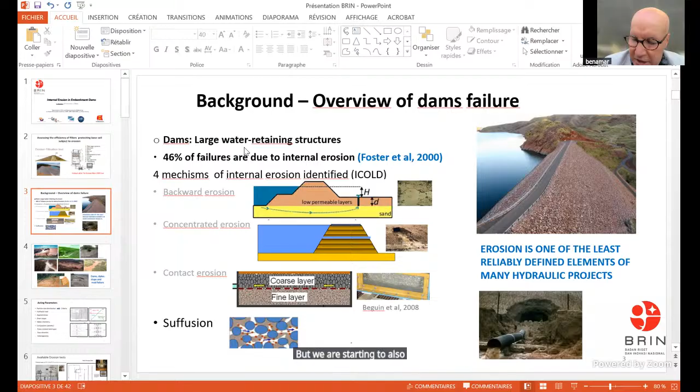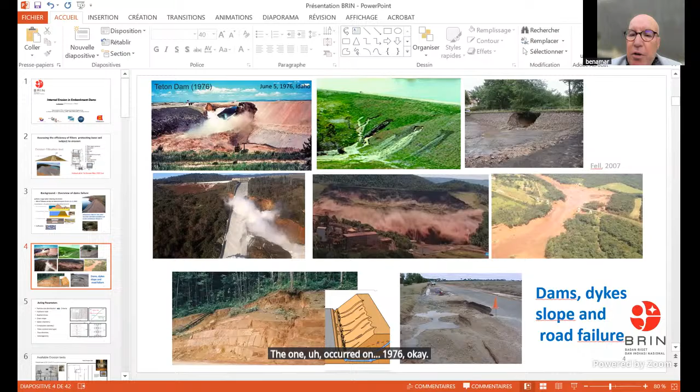These pictures show many incidents which happened over the world on dam collapse. The famous one is the one that occurred on Teton Dam in 1976. It was the most documented incident of dam failure.

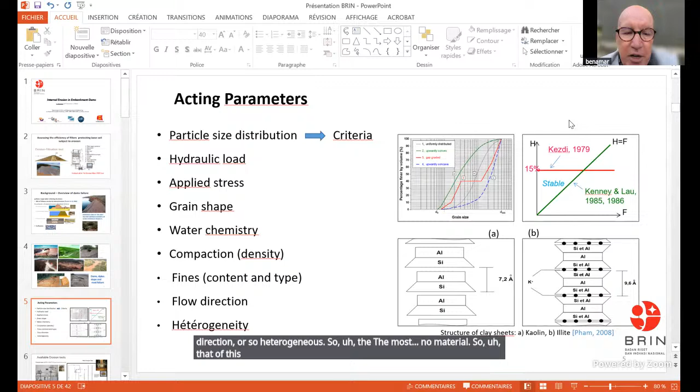Regarding the acting parameters on particle size distribution, many criteria were assessed by researchers: hydraulic load, applied stress, grain shape, water chemistry, compaction, fines content, flow direction, and heterogeneity. The most known criteria is that of Kezdi, which are still used in research.

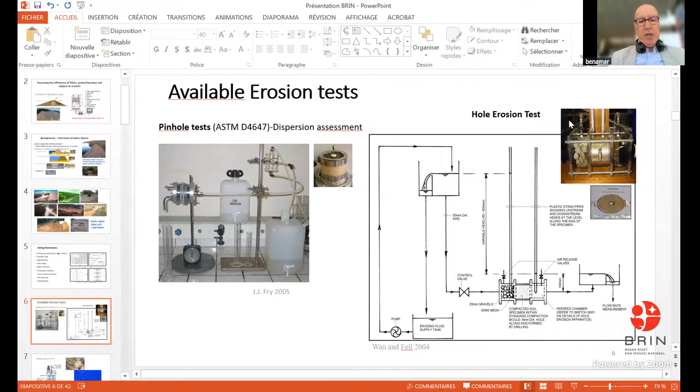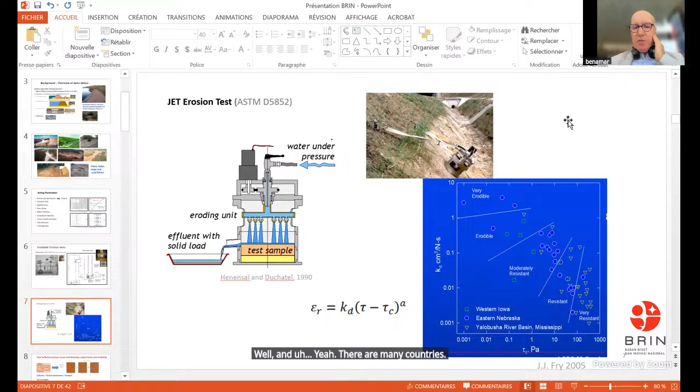The second one is the jet erosion test. This jet test was mainly used in the US. It was a dynamic hydrodynamic test, and there are many criteria in classification for this test to identify erodible soils.

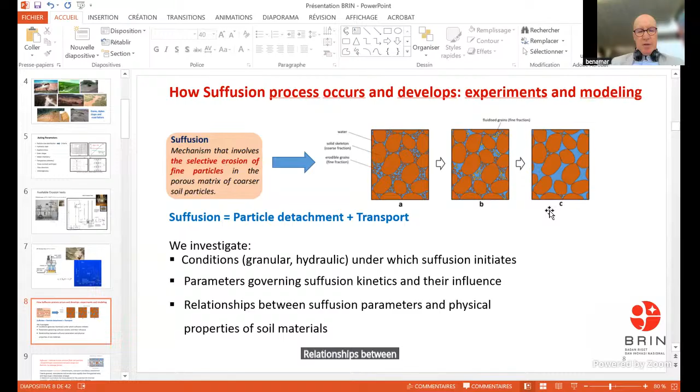Suffusion is both processes, particle detachment and transport through the porous material. So we have investigated the granular conditions of the tested material, the hydraulic conditions under which suffusion is set, parameters governing suffusion kinetics and their influence, and relationships between suffusion parameters and physical characteristics of soil material.

Suffusion is an internal erosion process where finer soil particles move through constrictions between larger soil particles by seepage forces. When internal erosion initiates, we also need to understand how it can develop and what the kinetics of this process are. Coarse-grained, non-cohesive soils erode more rapidly than fine-grained soils, as experimented in the lab, and have lower threshold stress.

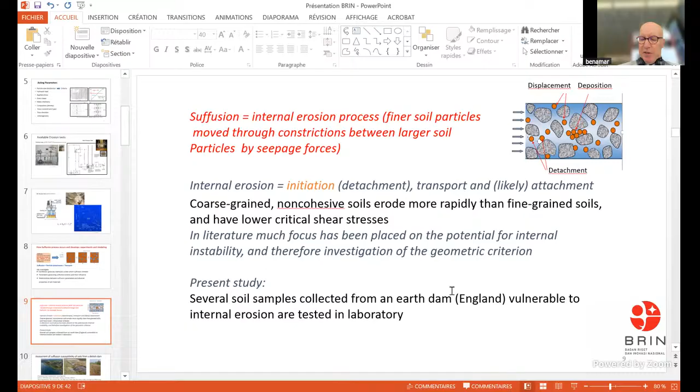In literature, much focus has been placed on the potential for internal instability and therefore investigation of the geometry. I present here a study about several soil samples from England, which is susceptible to internal erosion, tested in the laboratory.

A few words about this dam, Chasewater Dam in West England. It is an old dam, and one pathology was discovered a decade before on one embankment, with water seeping through the eastern embankment of the dam. So the investigation was performed in our lab on many cores collected in this embankment to quantify the dam's resistance to internal erosion.

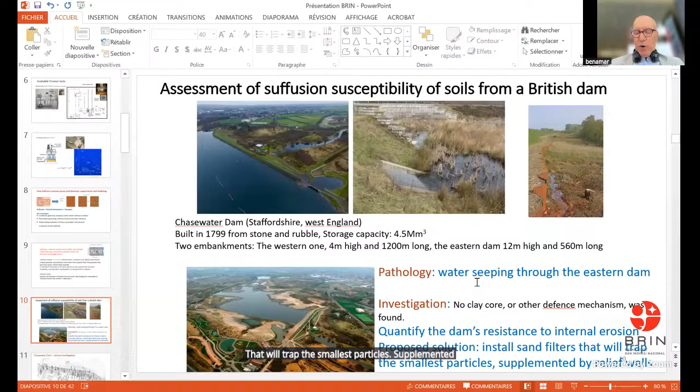The suggested solution for this pathology was sand filters that will trap the smallest particles, supplemented by relief wells. This is a picture about sample collection. These are the cores which were provided by Fugro company.

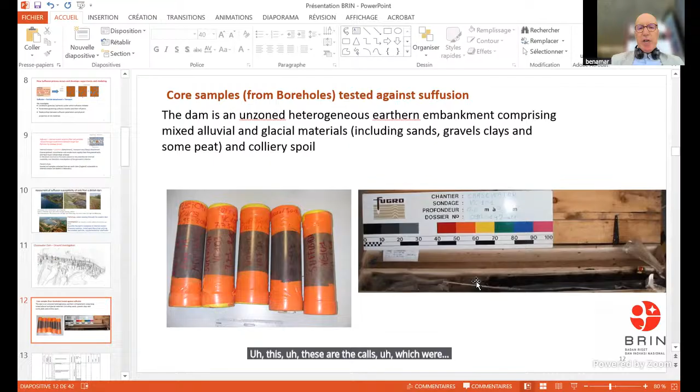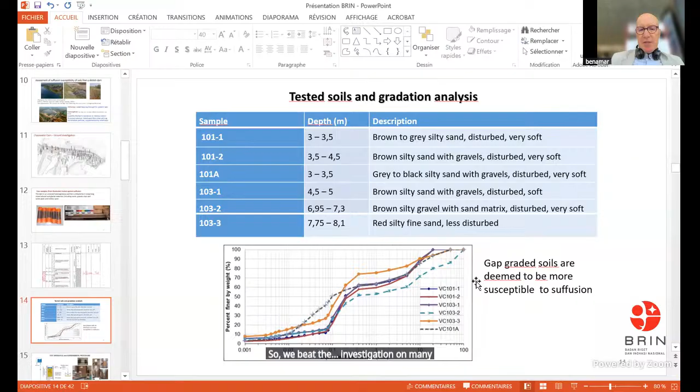We investigated hydraulic conditions under which suffusion initiates, namely the threshold value of hydraulic gradient or shear stress, which starts to initiate erosion or suffusion in that soil. We also identified the key parameters governing suffusion and quantified their influence.

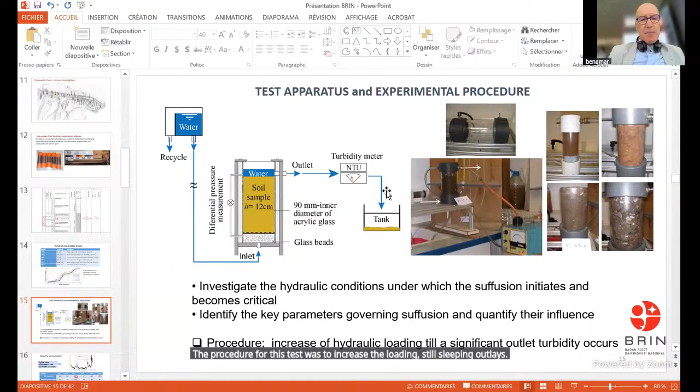The procedure for this test was to increase the loadings until significant outlet turbidity occurs. From that results, we attempted to give an overview of which sample was more erodible than others.

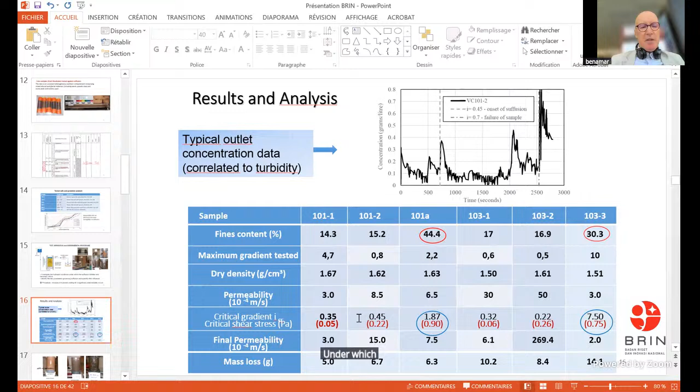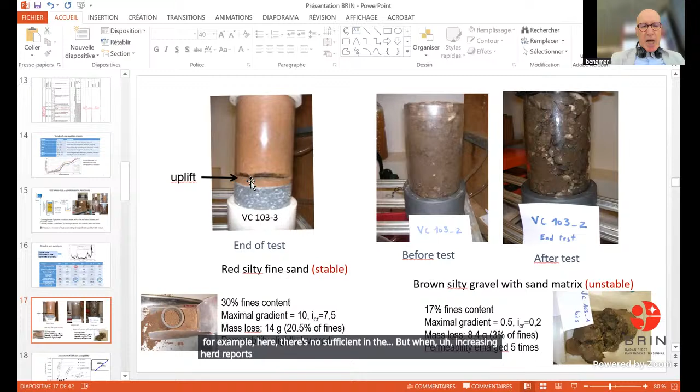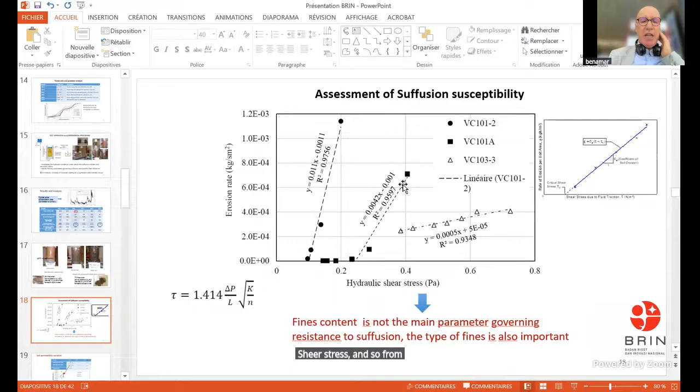From all results and data, we can characterize the erodibility of soil by drawing this parameter: erosion rate versus hydraulic shear stress. From this linear trend, we get a coefficient, the erosion coefficient.

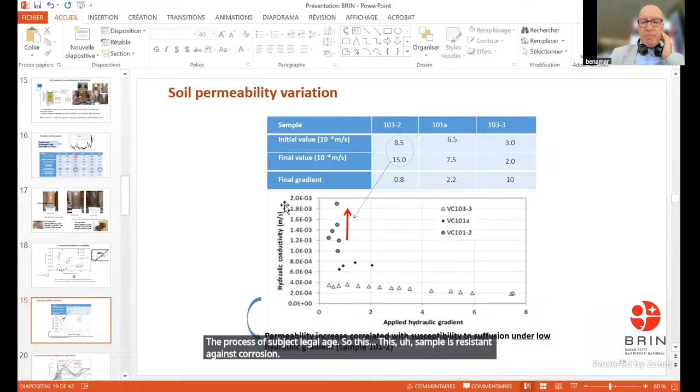There are many criteria in the literature to assess internal stability from this test. This one combines Kenney and Kezdi criteria, mainly used by engineers. From the data obtained from our test, we can assess if any sample is prone to suffusion.

So here we have many samples. We have this instability in this zone. This is the area where all these samples are unstable, so prone to suffusion. From all data, we assess and address this table, which gives the stability state of each sample.

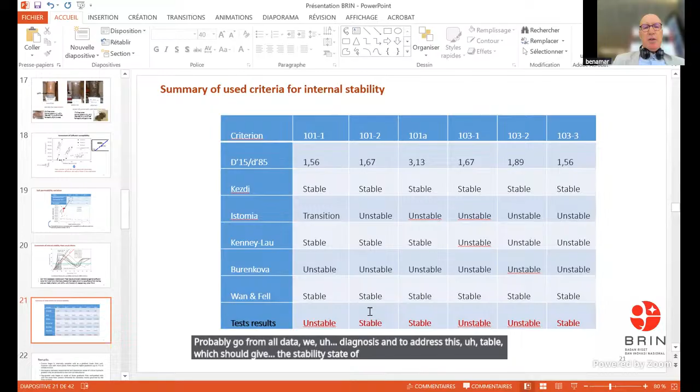From that study, the erosion begins in internally unstable soils at a gradient lower than unity, so they are far from the criteria of Terzaghi. Terzaghi stated that the critical hydraulic gradient to internal erosion is close to 1, but in many studies about internal erosion, this critical hydraulic gradient is lower than unity.

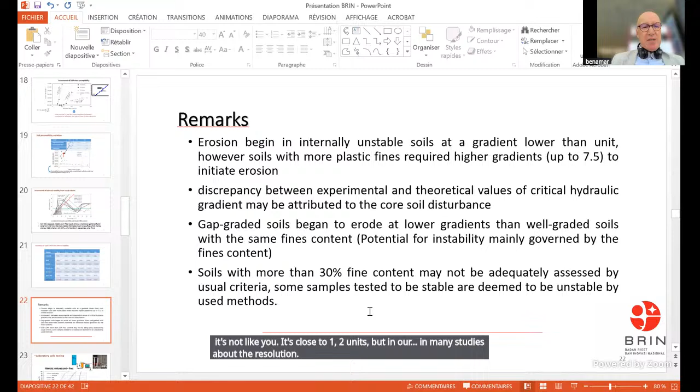A discrepancy between experimental and theoretical values of critical hydraulic gradient may be attributed to the core soil disturbance when we analyze our experimental results with the criteria, the result of many criteria like that of Kenney and Kezdi. There are many discrepancies because maybe that criteria were addressed for specific soils, which can be quite different from our tested soils.

Gap-graded soils began erosion at lower gradient than well-graded soils. It is known that well-graded soils are more resistant.

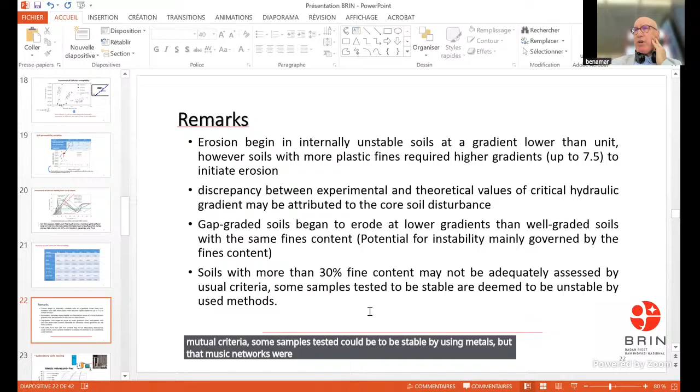Soils with more than 30% fine content may not be adequately assessed by usual criteria. Some samples tested to be stable are deemed to be unstable by used methods, but I think those methods were assessed for quite coarse soils. We tested fine soils like core, dam core soil, and this criteria is not suitable.

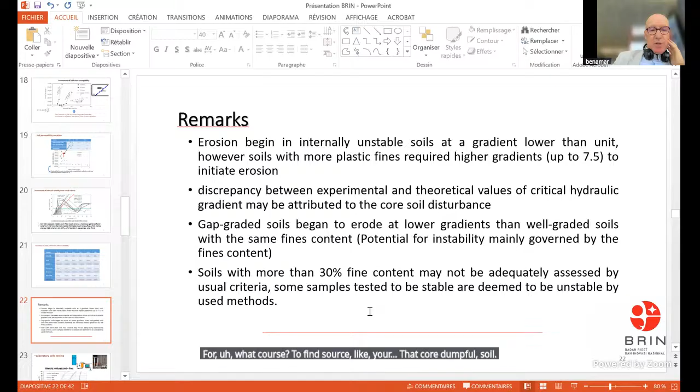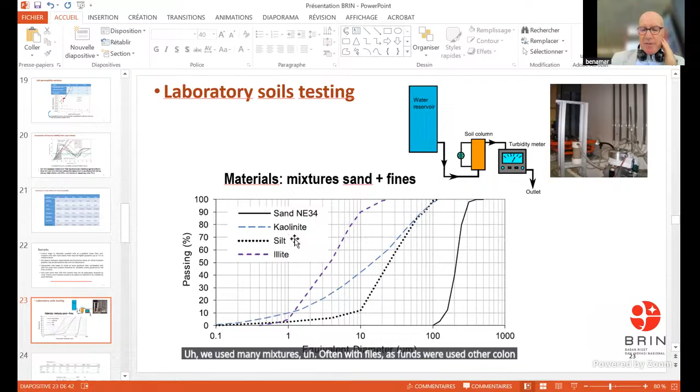In laboratory testing, we also tested the effect of fines type on susceptibility to erosion. We used many mixtures of sand with fines. As fines, we used either kaolinite or illite. These are the characteristics of the different materials.

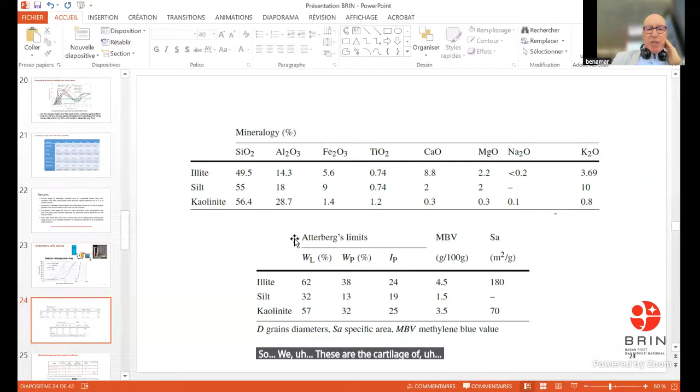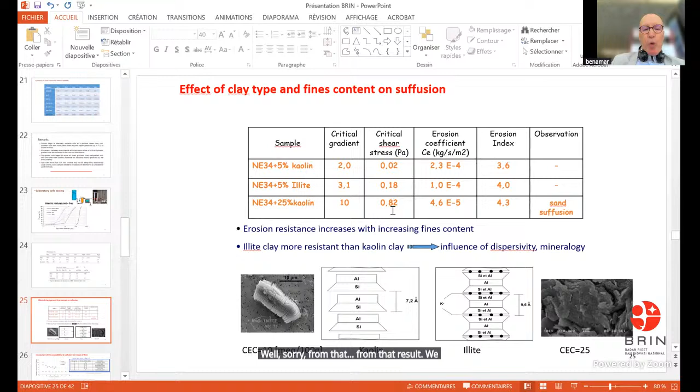What's the effect of clay type on suffusion? From these results, we made many conclusions about the erosion kinetics of these mixtures.

When we used, for example, 5% of fines, the erosion of silty soil is very rapid, while the erosion in mixture with kaolin or illite is more moderate. So the silt can be more erodible in soil mixture than other fines.

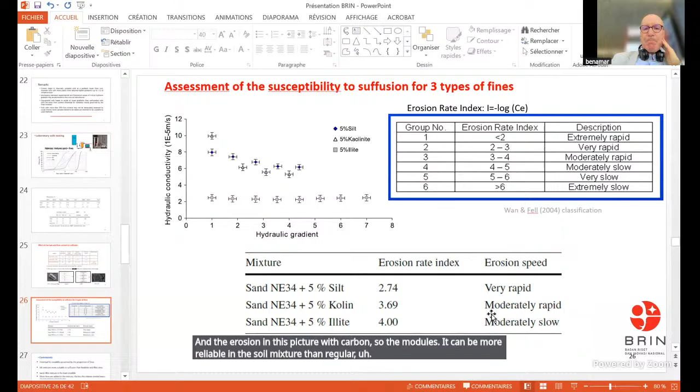The potential of instability is provided by the proportion of fines. Silt mixtures are more susceptible to suffusion than illite. The sand-illite mixture is the least erodible; illite is a clay which is the most resistant to suffusion. The more fines added in the mixture, the less the relative eroded mass.

It is known in engineering practice that when the fine content in the soil is more than 20%, it starts to be stable against erosion.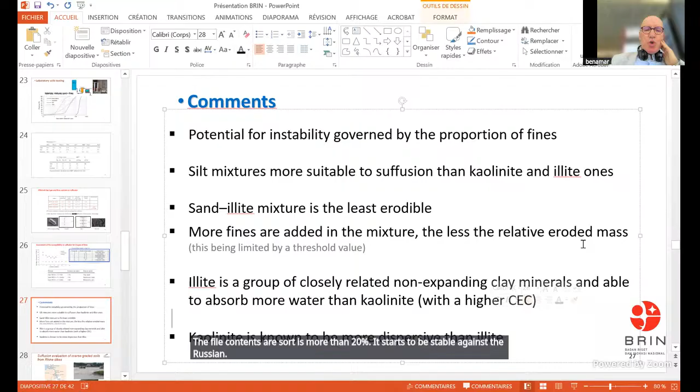Illite is a group of closely related non-expanding clay minerals, and they are able to absorb more water than kaolinite. That's why it can be more resistant to erosion, and also in dispersive tests, illite is the least dispersive one. Kaolinite is known to be more dispersive than illite.

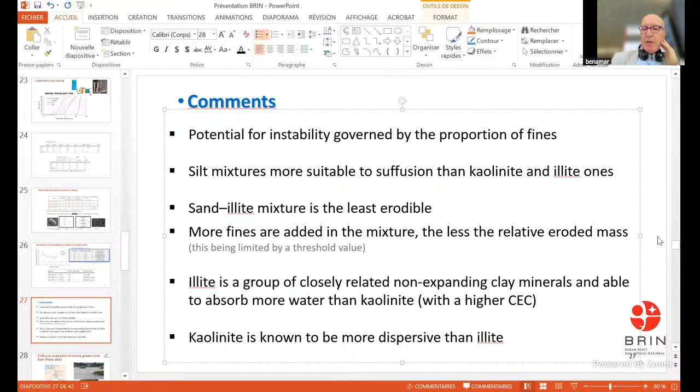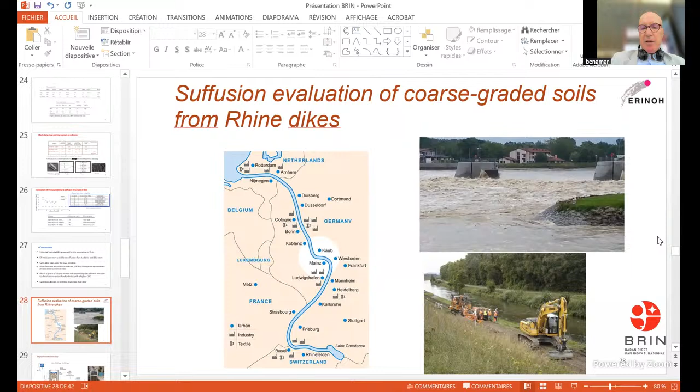Another investigation campaign was held on coarse soil. This coarse soil was collected from Rhine dikes in eastern France, on the border with Germany. This soil was tested in a large setup because it contains coarse grains up to 14 millimeters.

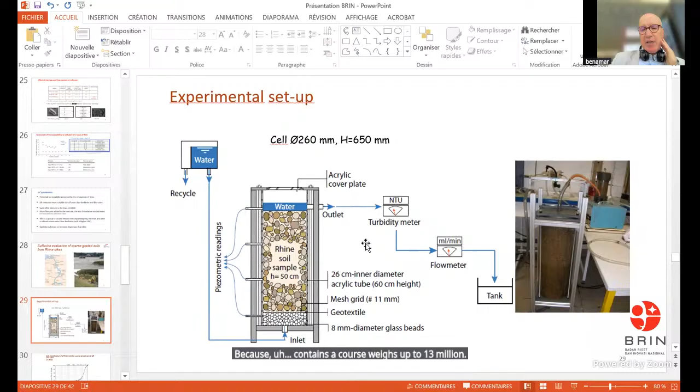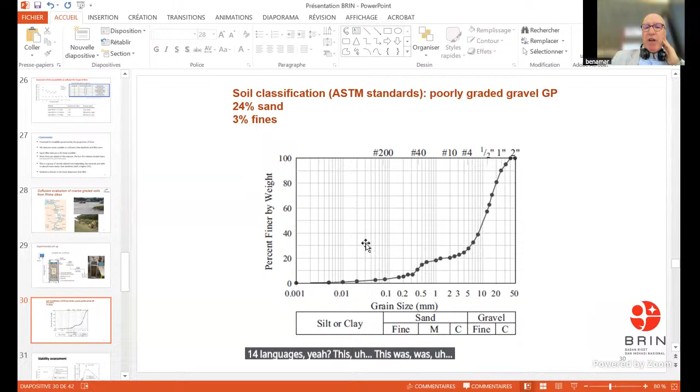We also compared our soil to other tested soils in the literature. Our soil seems to be stable; in many situations it is transition zone stable. But when we use the Kenney criteria, the soil also seems to be quite stable against erosion.

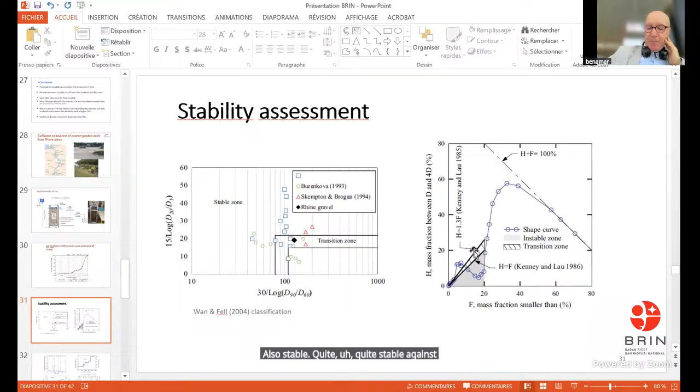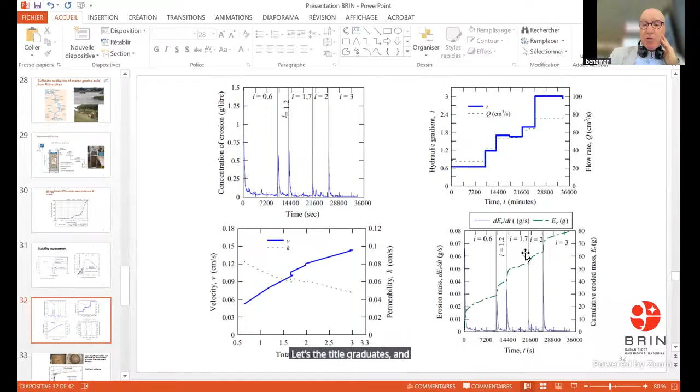These are the data collected from the tests: turbidity measurements, water velocity, tested hydraulic gradients, and the eroded mass from the samples.

In this test we measured the height from bottom to columns, and here we tested the local gradient. We investigated how erosion can occur inside the sample at different locations when erosion starts, because we can get erosion inside the sample without particles washing out, so it is interesting to have this analysis.

We see that the local gradient suddenly increases at the top of the sample. We see in this picture that many fine particles are washed out. To summarize these results, the tested gravel soil shows quite interesting resistance against suffusion up to a hydraulic gradient close to 1.

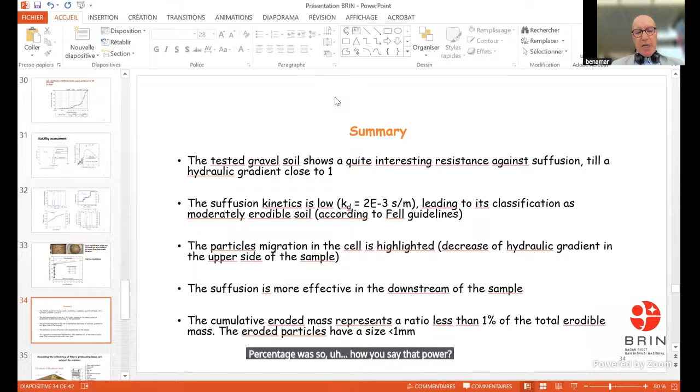The suffusion kinetics is low because the erosion coefficient is 2 times 10 minus 3, leading to its classification as moderately erodible soil according to Fell guidelines. The particle migration in the cell is highlighted. With the decrease of hydraulic gradient on the upper side of the sample, suffusion is more effective downstream, and the cumulative eroded mass represents less than 1% of the total erodible mass. Eroded particles are fine, and only a very low percentage was eroded, so we can say our soil is deemed stable against erosion.

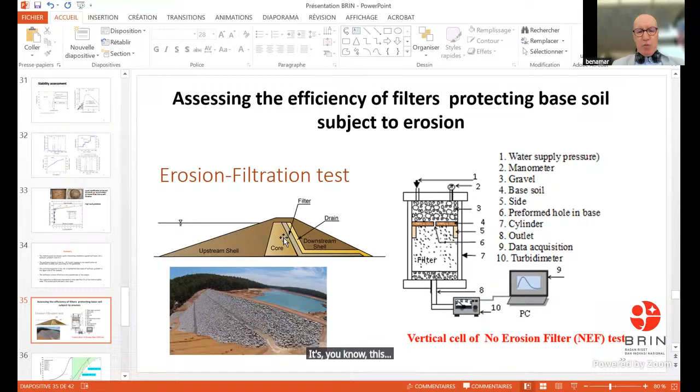We also tested the filtration. Filtration is important in the zoned dams because the filter allows retaining particles eroded from the core. When there is a crack in the core, fine particles can be eroded, but the filter can retain these particles. That is the action needed from the filter. From this picture, we selected our filter according to these gradient limits.

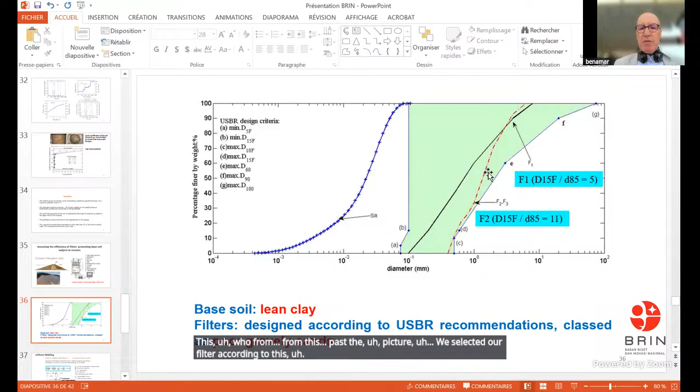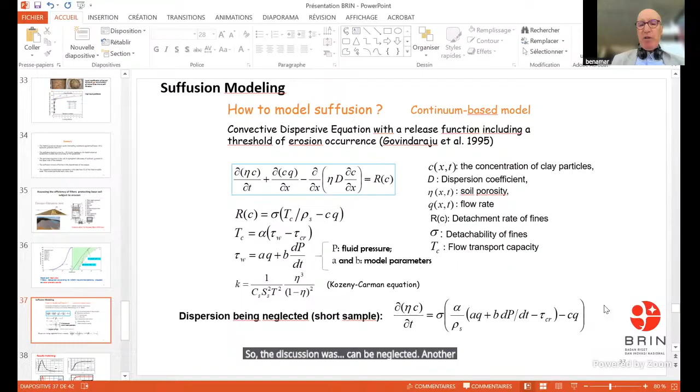Now I'll give a couple of words about suffusion modeling. To try to model this process in soils, we use the convection dispersion equation, with the variation of the concentration of fines in the soil as a result of erosion. The dispersion can be neglected, so we can simplify the equation to give analytical solutions. Here is the matching between experimental results and numerical data. We can see that this physical process of convection and fine detachment can modelize the process efficiently.

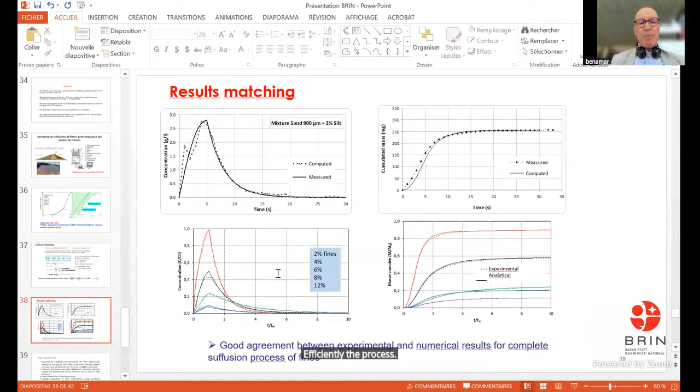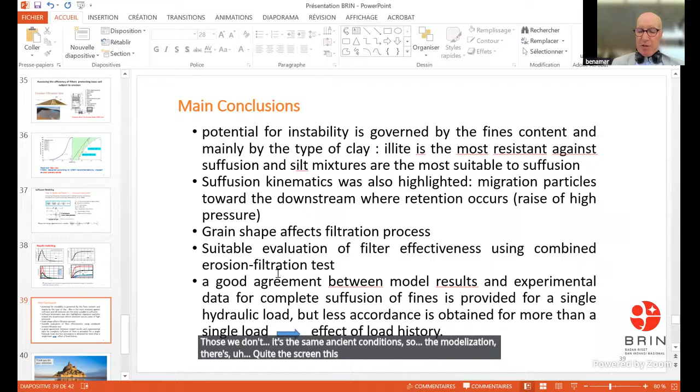A good agreement between model results and experimental data from this suffusion process was found for a single hydraulic load, but less accordance is seen for more than a single load, because when we apply successive flows, we don't take the same initial conditions. So in the modelization, there's quite a difference from experimental results. Thank you for your attention.

Sorry for this disturbance from the airport.

Thank you, Professor Benamar. Now we have time for discussion. How much time do you have for your flight? How much studies?

I think since 2008, or maybe 2005, so 20 years ago, we started investigation of this process in soils. So we performed many studies on it.

Is it okay? Sorry, is that your question? I think he's asking you how much time you have left before your flight. Oh, no, sorry, my flight is in 1 hour. Oh, so you still have enough time. That's fine for discussion.

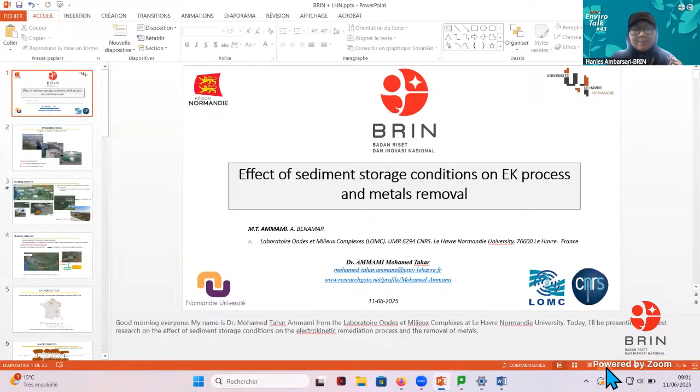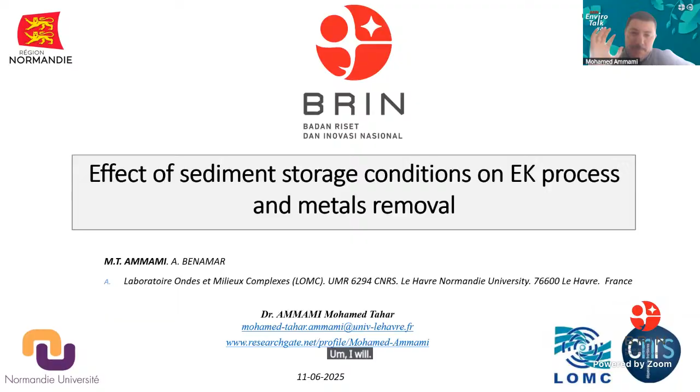So for today, I will talk a little bit about some activity in our lab, about remediation of contaminated materials. My presentation will discuss the effect of sediment storage condition on electrokinetic process and metal removal. I will divide my presentation into different levels. First, I will talk about the main problems we have in our city here, about the dredging activity.

This activity is vital for the harbor and any maritime canal. Usually we use this activity to maintain conditions of transport in the maritime area, to develop facilities for the harbor, and it can also help create a new site, for example.

When we talk about dredging in France, we count 50 million cubic meters of maritime sediment on average every year. For river sediment, we count 6 million cubic meters in France. This activity is huge and generates a large quantity of sediment.

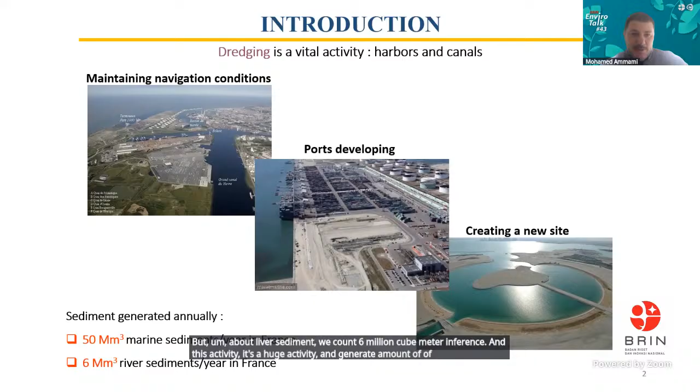Second point, about our area. Le Havre is a port city, and we have the first harbor in France for container transport. The connection between Le Havre and Paris is around 2 hours.

But we have a river, the Seine. It helps maintain the economic activity when we bring containers from Le Havre to Paris. When we talk about maritime activity, usually we talk about dredged sediment, materials, and how we maintain this activity.

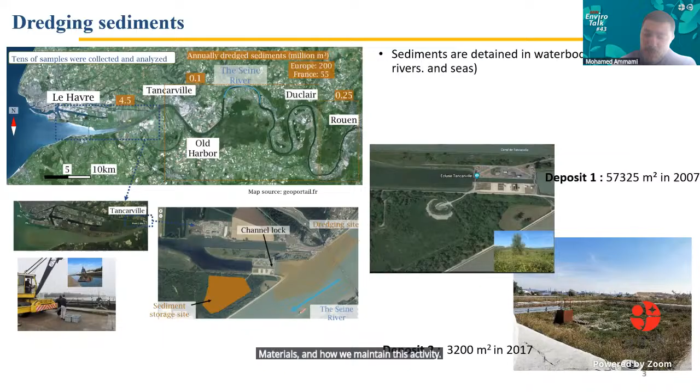The problem when we dredge materials is that we have a new standard coming every year. For example, to give a global picture of what happens here: usually 95% of the sediment is dumped in the sea. This rule is becoming more difficult because the standards, year after year, become stricter.

We estimate 5% of dredged sediment is contaminated, and we don't have permission to dump it in the sea. So we need some kind of solution to deposit these materials in temporary storage. Our harbor here counts 3 million cubic meters of dredged sediment every year, so we have a lot of material.

We deposit it in specific areas. These specific areas are becoming busier, and we need to look for good solutions to reuse the materials.

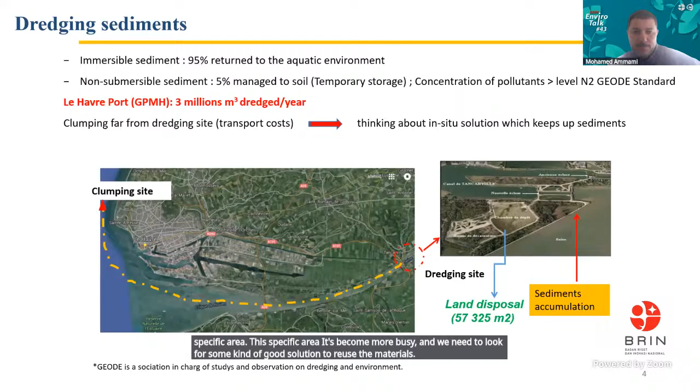There is another kind of problem in France: a huge number of sites polluted by heavy metals, hydrocarbons, and pesticides. We count more than 7,200 sites that need to be treated in France.

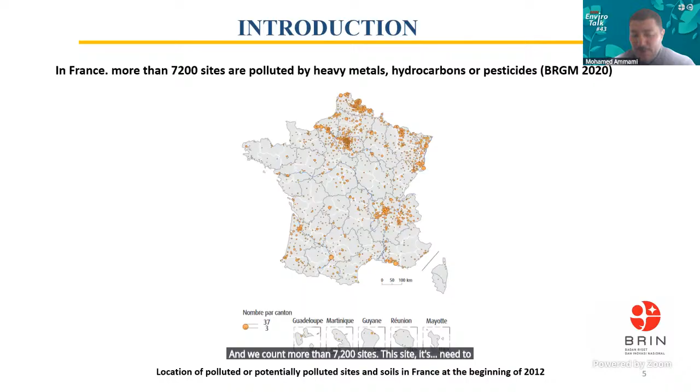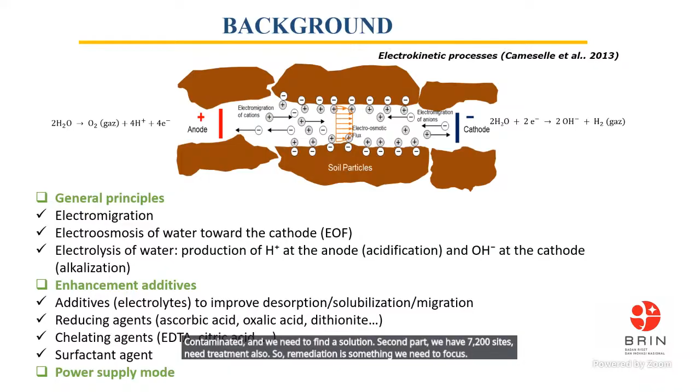So when we look at this information, we have a lot of contaminated sediment and we need to find a solution. Second part, we have 7,200 sites needing treatment also. So remediation is something we need to focus on to fix the problem for this kind of material.

As a lab in civil engineering and environmental science, we think carefully about how to fix the problem and how we can make these materials usable in construction. So we choose a method for remediation: the electrokinetic process.

And why do we choose this method? This method has good advantages, which I will explain. But first, how does this method work?

When we apply an electric field in the soil, we first destroy the electroneutrality of the medium, meaning the balance is destroyed, and this generates transport mechanisms. The main transport mechanism is electromigration, meaning the transport of any charged entity toward the opposite charge.

And we also have electroosmotic flow. Electroosmotic flow is the movement of water depending on the electric field, and it depends on the charge of the surface. So why do we call it electroosmotic? It's a surface phenomenon.

We mainly have some chemistry reactions, and the most important is the electrolysis of water. This means at the anode side we produce H+, so it becomes more acidic close to the anode. At the cathode side, we generate OH-, and the pH increases there.

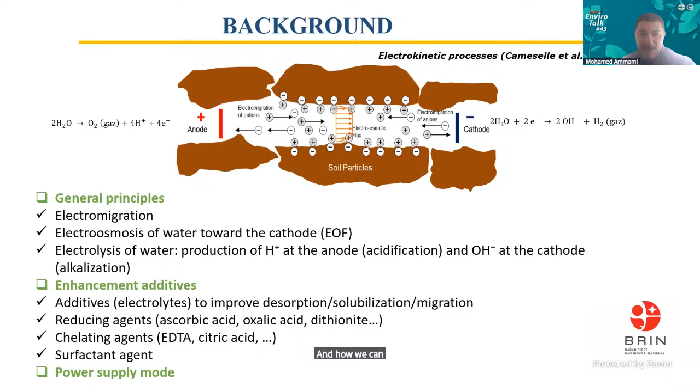So for the advantage and why we choose electrokinetics, we choose it because we can apply this technique directly in the field. Another interesting point is that this kind of treatment works well with lower permeability soil, meaning fine particles. So if we have a lot of silt or clay, this kind of treatment is more suitable to apply.

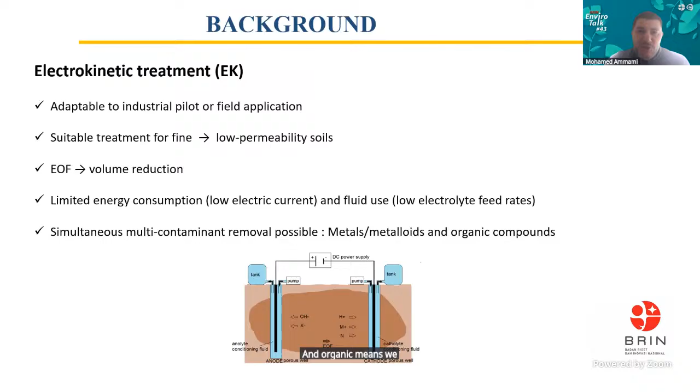We can also use this technique to reduce the volume of the chamber where we have sediment, meaning we can improve the dewatering by electroosmosis. We can talk about the limited energy consumption compared to other processes like thermal treatment and flushing. We use lower electrolyte additive. Another good point is that it works for both metal and organic elements, meaning we can target charged and non-charged elements in the medium.

Our research work is about how we can use sediment and make it suitable for civil engineering construction. To reach this goal, we use two mechanisms: electromigration and electroosmosis. Electromigration is applied for any particle with charge. Electroosmosis is applied for any particle with no charge or no ionic species.

To test this in the lab, we developed a kind of prototype, and the idea is simple. We have a prototype divided into three parts. In the middle is the sediment or materials part, and on the left and right we have the compartments of the anodic and cathodic parts. We inject the molecule by pump, and we have an overflow system to collect the leachate. Our aim is to inject what we need to modify the physical-chemistry parameters in the medium and make it easier to extract elements.

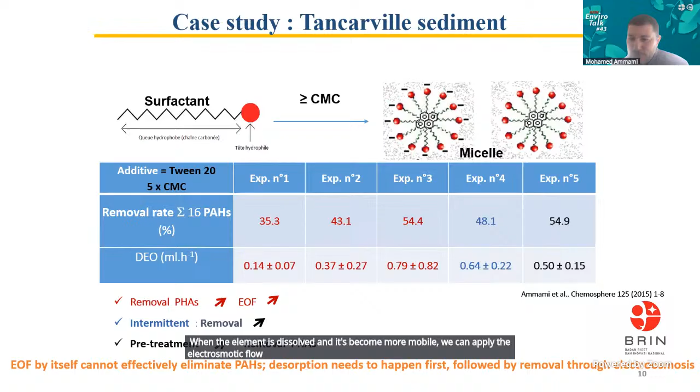I will talk about another case study, which happened in 2021, while we were still in COVID. This study focused on some elements in metal and arsenic. It happened in an area here in Le Havre city. We had an industrial accident, and a lot of elements escaped from this area. So the company made a geomembrane to protect this area, and asked for our help to see if our technique could help extract the elements easily. So we made some laboratory scale tests, and our aim was to achieve a quick and significant reduction of metal concentration.

In this table, I present the concentrations we found: we have cadmium, copper, and zinc. The arsenic concentration is so high. I forgot to mention something - the sediment usually has low metal content, but when there's an industrial accident, the concentration becomes more interesting, meaning the treatment becomes more interesting too. So what we did: we applied the treatment, a simple test with citric acid and with tensioactive, Tween 20.

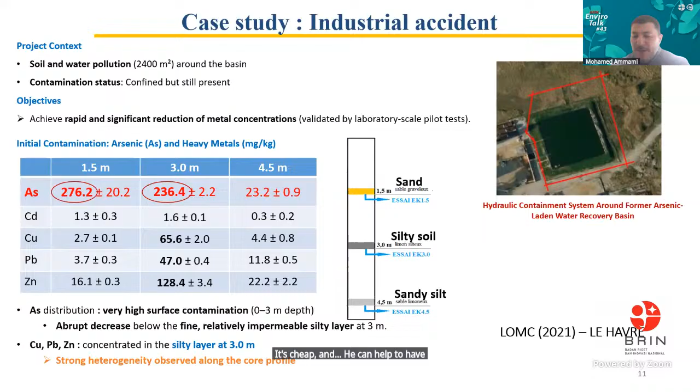I like to say something. When we apply the treatment for 3 weeks with one or two agents or additives, usually the process is more complicated than this. This experiment gives us the idea how it works, and after that we are able to improve the treatment and make it more sophisticated to reach better removal.

One of our conclusions from this study: we try to compare why sediment and soil are different. For sure it's different, because the bounded connection between the metals and the sediment is more deep, because the pollution has existed for many years, more than decades. But in the soil, we don't have yet this kind of strong bond between metals and the particles of soil.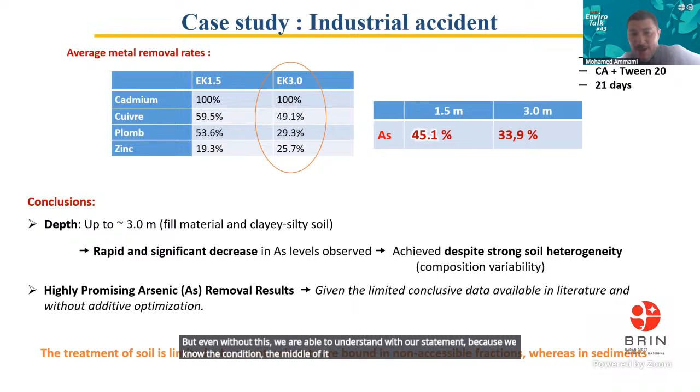I will present the last case study, about the storage condition. This study is still in progress, and we still work on it, so I will present some part of the result here. Why this kind of case study? Why do we look for storage condition? Usually we work in the lab with controlled conditions.

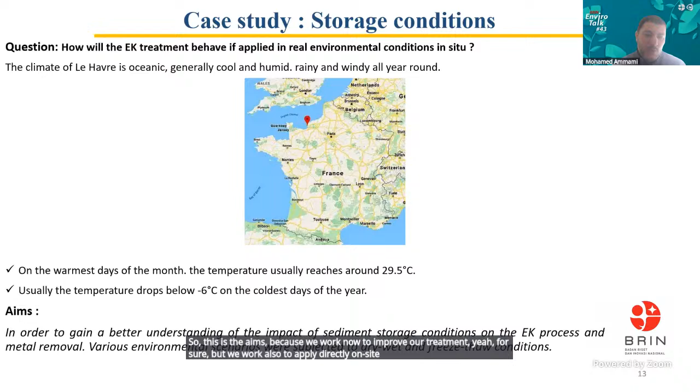So we start to ask a simple question: what if we apply the treatment in the true condition outside? In our city we have different kinds of temperature, different weather, and we need to know if the result of the treatment is still the same or not. So this is the aim, because we work now to improve our treatment, but we also work to apply it directly on site, and it's part of our aims for the next step: to apply for big scale treatment.

In this study, usually our methodology is that we control any change when we treat the sediment. We control all the physical chemistry parameters: the electricity, the electroosmotic flow, the additive we give, the pH. After treatment, we slice our materials and analyze by mineralogy, XRD for example. We check the total carbonate, the organic matter, and we analyze it with XRF, meaning the content of the metals. We use this protocol for all the experiments.

So here, to make it easy, we have 5 experiments, but usually we will focus on experiment 2 and experiment 4 to compare between them. Why? Because we'd like to know the effect of the freeze-thaw. We made the sediment in experiment 4 at -6 degrees, and after that we start the experiment to see if the freeze-thaw can really affect the treatment.

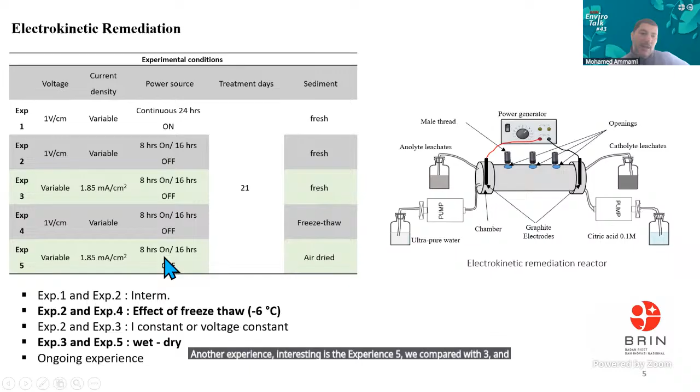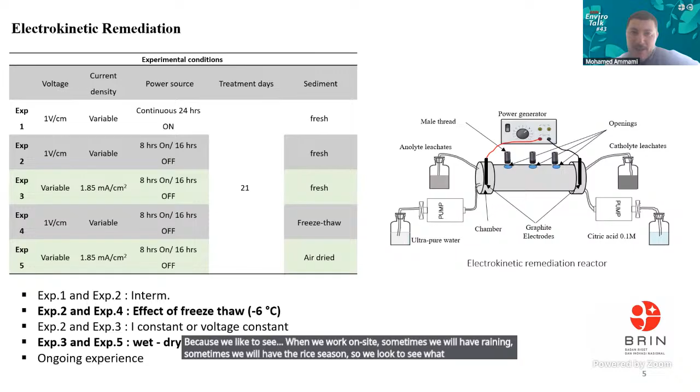Another interesting experiment is experiment 5, which we compare with experiment 3. This will be about the wet-dry cycle, because we'd like to see how, when we work on site, sometimes we will have rain, sometimes we will have a dry season, so we look to see if the electrokinetic process can be affected or not.

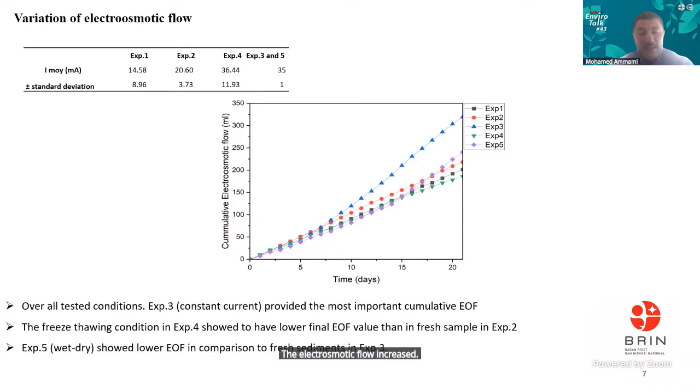Another important parameter is the electroosmotic flow. Usually the electroosmotic flow is proportional to the applied current, so when the current increases, the electroosmotic flow increases. But it's not always true, because there's another parameter: the double layer theory. This means it's not only the electricity increase that affects the electroosmotic flow, but also what happens in the thickness of the double layer.

What makes it more interesting is we can compare, for example, experience 4, the freeze and thaw, shown in green. We can find experience 2, the red, is better - the electroosmotic flow is better. But it's the opposite regarding the species, the increase of the species.

But in this case, we can explain it: when electricity increases, it means we have more species, so there's some proportionality there. But when it doesn't work, like between experience 2 and 4, it can be explained by what happens in the double layer theory and the thickness. Because when we have a lot of elements in the double layer, the thickness changes and the mobility of water becomes limited.

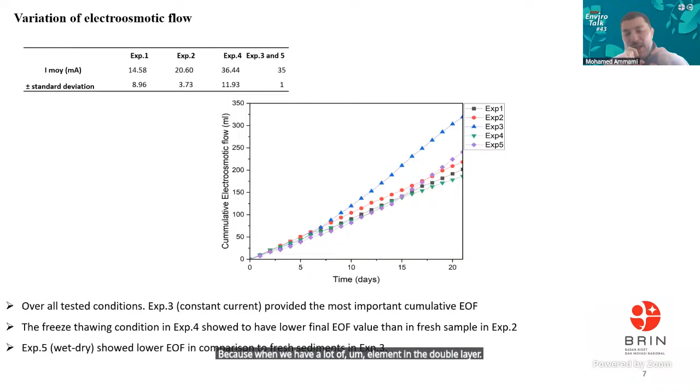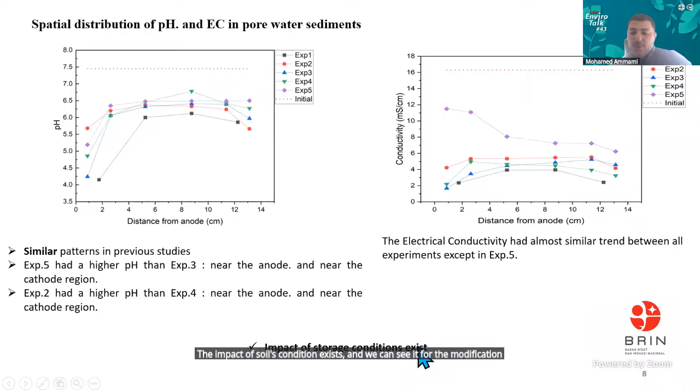After treatment, we controlled all the mineralogy by XRD, carbonate also and organic matter. What we find interesting is the initial sediment had a carbonate content around 30%. We also find the carbonate dissolves when the pH becomes very low. From these two experiences, we have more dissolution of the carbonate, and the decrease is caused by dissolution, which is caused by the acidic pH.

But when we check the granulometric size, the distribution size, and the organic matter, we didn't find any change from anode to cathode. We didn't find any modification, and this is one of our conclusions - so the treatment doesn't really affect the particle size and doesn't affect the organic matter.

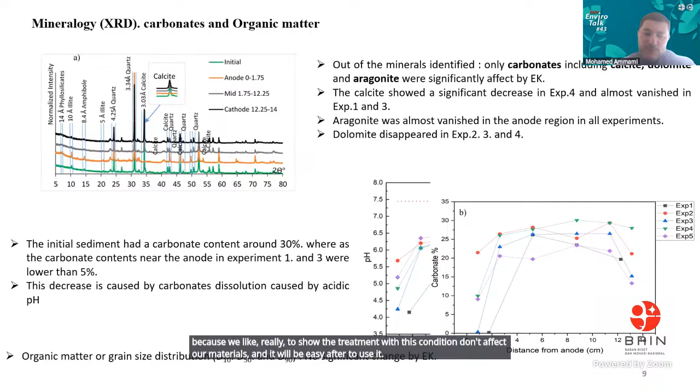Maybe this is because we use citric acid and the pH is not so acidic, so we don't modify our materials. We're lucky because we'd really like to show the treatment with this condition doesn't affect our materials, and it will be easy afterward to use it for another kind of use, like in agriculture for example.

Concerning some elements, we checked some salts, the chlorine, and looked at the removal. What makes it important here, and confirms what we find, is that the storage condition affects the electrokinetic treatment. So when we check, for example, for experience 5 and 4, the removal is different - 40% from the sample until the cathode area.

Another kind of removal - I will talk a little bit about chlorine, because we are motivated to extract chlorine if we use the sediment for agriculture. We show how we are able to extract chlorine correctly because it's an easy to extract, mobile element. But what makes it more interesting is when we look at experiments 5 and 4, meaning the storage condition - we find in the anode we don't have the same removal rate. This confirms that storage condition really affects the treatment and also affects the rate of removal of the element.

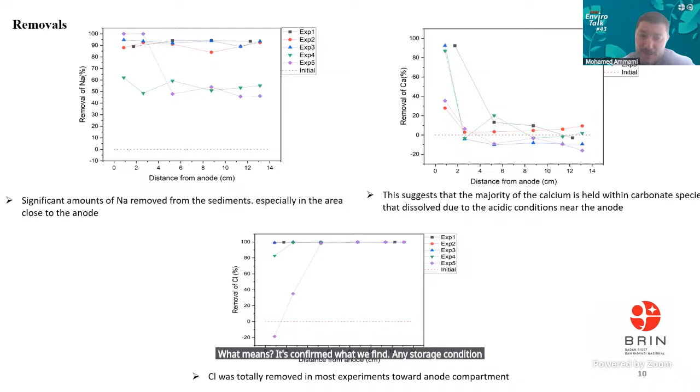I'd like to give some conclusions from my work. Our investigation looks to better understand the impact of sediment storage condition on the electrokinetic process, and we used different kinds of conditions like wet-dry tests and freeze-thaw conditions.

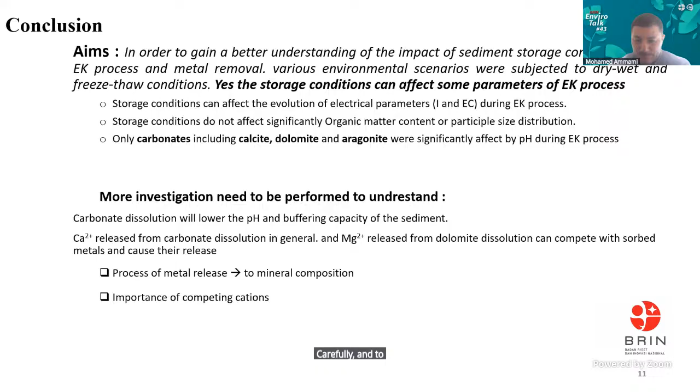Thank you for your attention, and I will be happy to reply to your questions.

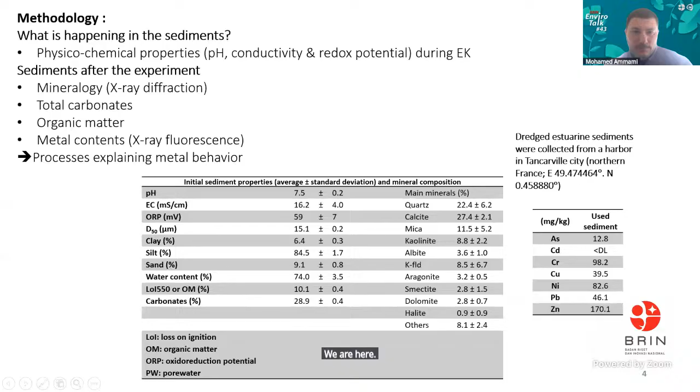Okay. So this is why I said, in our case study, we don't use oxidation conditions. We control it, so we don't have it.

Okay, I will look now for the third question. I will read it. How long can the electrodes usually be used for this technique until we have to replace them? How do we know when the electrodes have already deteriorated?